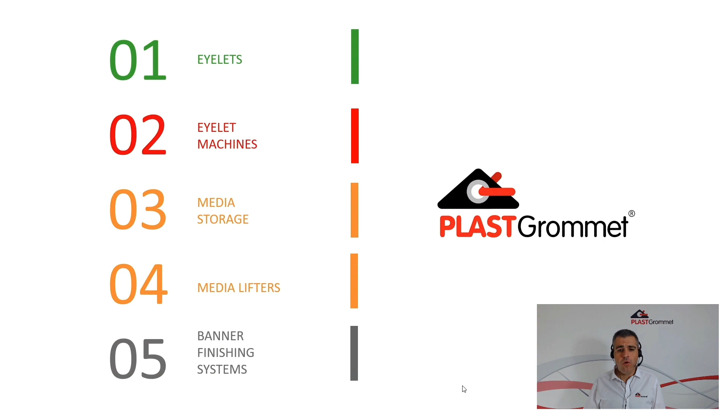So the product range covers 5 different segments. We have eyelets, or grommets when we speak about the American market, eyeletting equipment, media storage racks to better organize the media rolls, and then we have media lifters. We have several models. And then what we call the banner finishing systems, the products we have to optimize the finishing of the banners.

So speaking about the eyelets, this is where we come from. The name of our company is PLASTGrommet. I think we've been the first company producing clear grommets for digital printing. We have our own plastic injection factory, so this is our own production.

We have a huge stock of millions of grommets or eyelets ready to ship, as we have many machines working with them worldwide. So we had to be able to deliver quickly, and our customers really like that we produce the equipment together with the consumable. All the machines are made exactly to the size of the eyelets, so everything works perfectly.

Clear eyelets are, we think, a real alternative to the metal ones for the graphics industry, because they are recyclable, resistant, and invisible. You can see it on the image on the right hand side. You can see the color underneath. This really makes the final banner look better compared with the metal ones.

And especially these days with all the price increases, they are really cost effective, because the price of the raw material is quite stable. It has gone up like everything else in the market, but it is more stable than the metal ones. So a lot of customers are choosing clear eyelets as a very cost-effective way to finish the banner, not only because of the look, but also because of the cost effectiveness. So we really call it the smart choice.

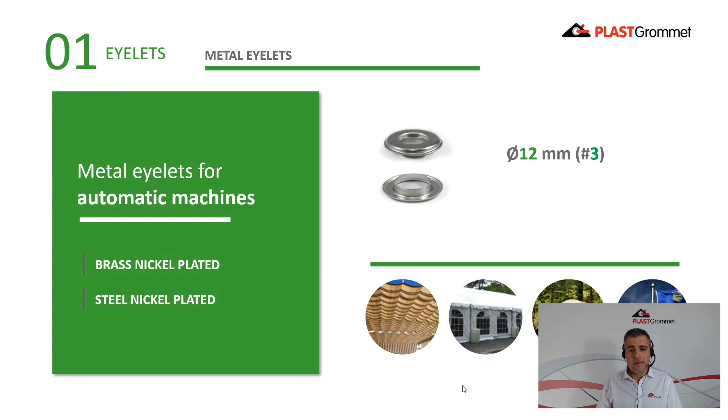And exactly as with the clear ones, we have stock that we can deliver to customers, and these eyelets are for automatic machines with neck washers, and they work perfectly with our equipment. So we are now able to cover the entire market, no matter the type of eyelet you need for your production.

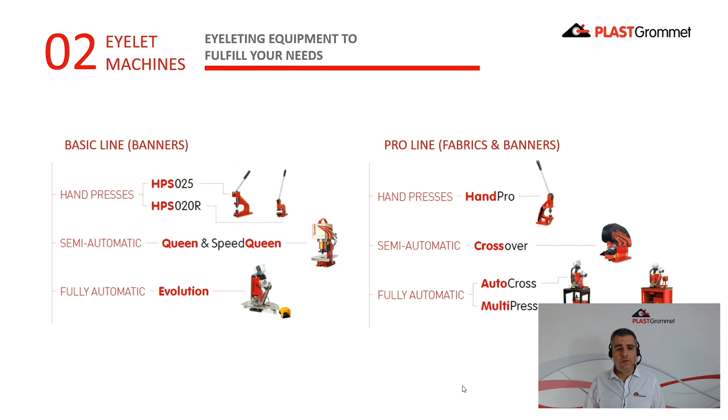In both ranges, we always have a hand press, then a semi-automatic pneumatic machine, and then fully automatic machines. In the Pro line, we have two different models, AutoCross and MultiPress. Multipress basically has more features than autocross, so more electronics, so it really goes to the high end of the market, and it has something called pre-cutting.

That means we don't cut and set the eyelet at once. First the machine does the cutting, and afterwards it sets the eyelet. This is really appreciated by customers setting eyelets on fabrics, because the finishing is much better, since you reduce wrinkles 100%.

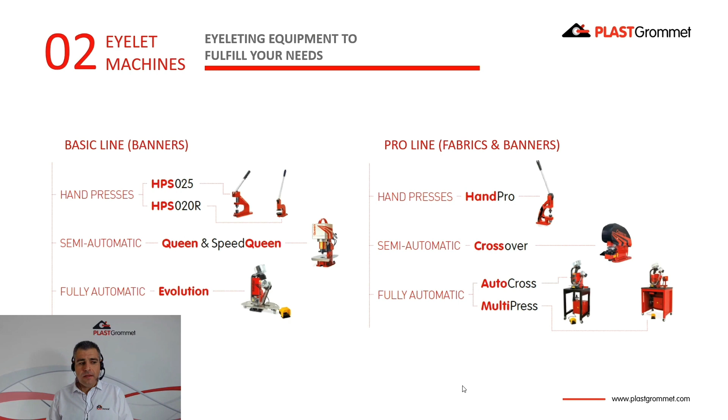And then we move to the media storage racks. Okay, so rolls are normally all over the ground. They get damaged, dirty, and things like that. So we have a range of about 10 different products, also for a small format and also for up to 5 meters, that you can use in order to organize better your rolls.

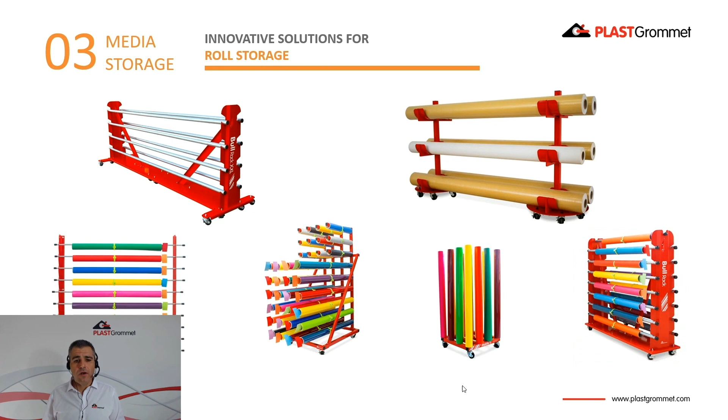The one we have, for example, on the right top is called a Jumbo Rolls Transporter. That unit works perfect with 3.2 and 5-meter rolls, and it can be allocated next to a printer. So for example, if you need to have rolls ready to be loaded to the printer for a night shift, you can have them there, and with a media lifter you can load it directly from the rack to the printer with a single operator. So end of the day is trying to find small efficiencies that will make the job easier and faster.

These are some examples. Sometimes customers will send us pictures of their shops, and you can have the ones we have in the center, that's called Bull Rack, horizontal storage of 15 rolls up to 1.62, and you can have them side by side. Then on the corner at the bottom, we have multi-rack, wall rack. So end of the day it's different ways to save space and to store the media better, so rolls don't get damaged.

We come to the media lifter range. So this is a product that is becoming more and more important in PLASTGrommet because there is really a large demand for this kind of devices. So the first one we got was the one in the center. It's called a compact lifter. This is a hydraulic lifter that's capable of lifting up to 200 kilos. And it is very easy to use. Operator has to press the pedal in order with the pump to lift the roll.

And then you can see that in the front of the lifter on the forks, we have a metal part that has 3 different positions. So it can be like this to load the printers. You can have it like this for safety, transportation, and it will go downwards when you want to load the rolls from the ground.

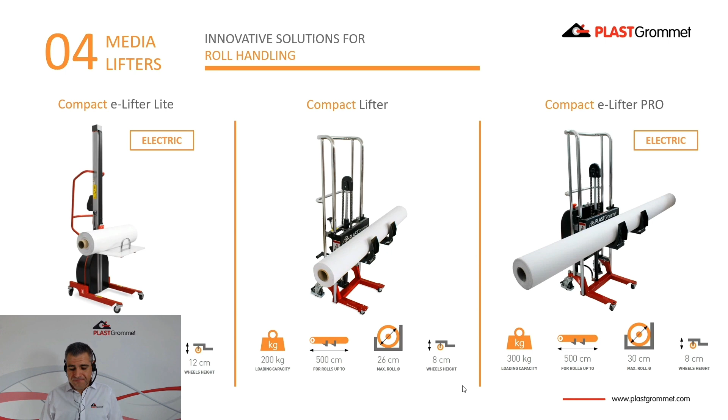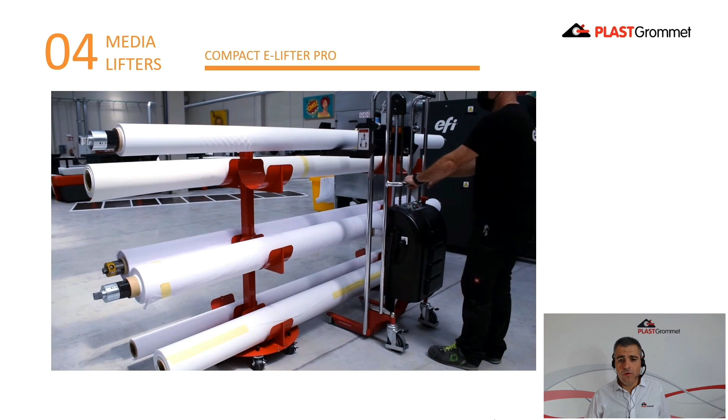That happens a lot of the time, and it is extremely easy to move it from the shop to the warehouse. We have some customers that are getting it just to transport boxes in the picking area. This is a video where we can see in combination the jumbo roll transporter together with the compact e-lifter.

Okay, so this will be the core of the presentation. So these are what we call the banner finishing system. So what we do is integrate eyeletting equipment in machines in order to make not just eyeletting, but different processes as well, okay? So the one we have on top, we call it Roll2Roll Lite. This is a product manufactured for companies that are making rolls of fence mesh.

I know in Europe it's not common, but for example, in Australia and New Zealand, a lot of people will use pre-hem mesh. So that's mesh that already has a hem welded, and then you print on the material that is already welded, okay? And then the advantage is that out of the printer, you have a roll that already has the hem, but still you need to eyelet it. So we have this system with 2 eyeletting heads on the sides and then a couple of air shafts on each side. So it is very efficient because a single operator is able to finish both sides real quick. Then, for example, we move to the all-in-one that we have mentioned before.

This is the inline system that integrates welding, eyeletting, and slitting or rewinding on the back. So this is really the product we have that automates the production the most. As I said, if you have the correct type of jobs, this piece of equipment can really make the difference in your finishing operations. Because if you are printing, for example, fence mesh, not pre-hemmed, that you need to do the hem out of the printer, this kind of machine in 7.5 minutes will be able to finish a 50-meter

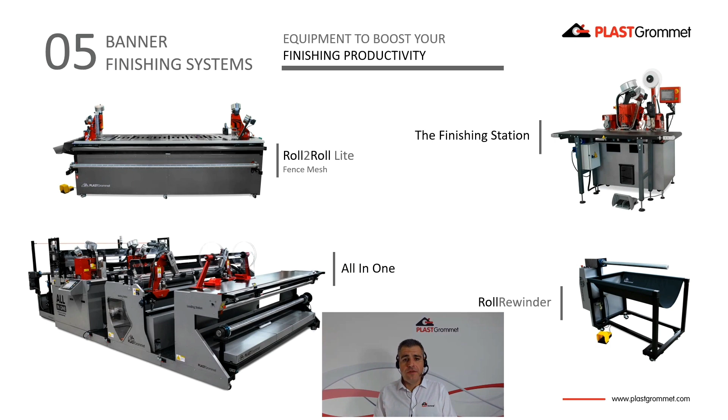And then we have a small device that we call roll rewinder, because many times the small banners that customers make for supermarkets and fast food chains, you need to roll them for shipping. Normally that would be a process that you do by hand. With this kind of rewinder, you can use it with or without a cardboard core. So you will roll them real quick, and then with a poly bag and a label, the banners will be ready for shipping. So those are small things that, when you put them all together, really make a difference in terms of finishing efficiency.

And this is the kind of workflow that we displayed at FESPA Berlin this year. So we were trying to explain to customers how to achieve an efficient workflow. We were starting at the booth, loading the rolls with a compact lifter instead of doing it by hand, as everybody does. Still, when you go to the shows, you see that technicians are loading the printers by hand, and that's dangerous for the back, and that's not very professional.

So with this kind of tool, you can easily load the rolls, you finish the long edges with the all-in-one, and then you move to the finishing station for the short ones, and then you take the banners for rewinding. So that is how we see the workflow in terms of banner finishing when you have large productions.

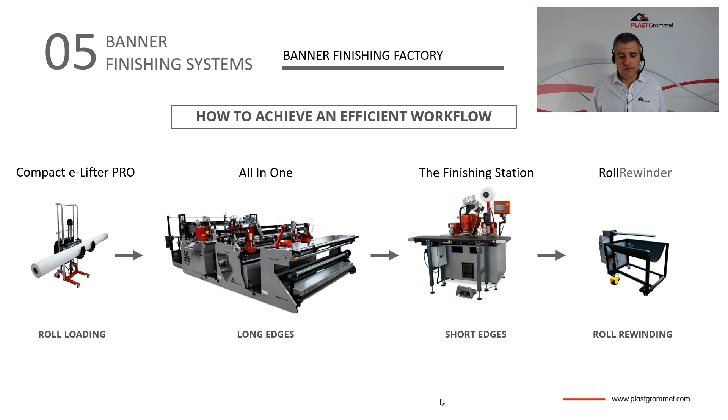So let's talk about the finishing station itself. As you can see, the machine has integrated a welding head together with an eyelet press. In this case, this is a multi-press. From our Pro range, it is the most advanced machine. In front of the machine, we have a conveyor belt that is fully synchronized with the rollers that the machine has.

So we have one traction roller on the left of the welder, and then we have another one on the other side. Everything is fully synchronized in order to reduce wrinkles, because if one roller goes at a different speed than the other, it is not going to be even, and the hemming won't be a good finishing. We are able to make 3 different types of finishing with this machine.

The standard one will be the hem. We are also able to do webbing tape. That will be a polyester tape, PVC coated. Normally it's used for fence mesh because the mesh itself is a weak product because of the light weight it has, and when you make a hem, still it will be like 350 grams or something like that.

So the majority of the time you will add a webbing tape welded in order to make a strong product and more durable outdoors. And also, not very often used, but if you have this kind of finishing in your production, a really fast way to finish is to have keder.

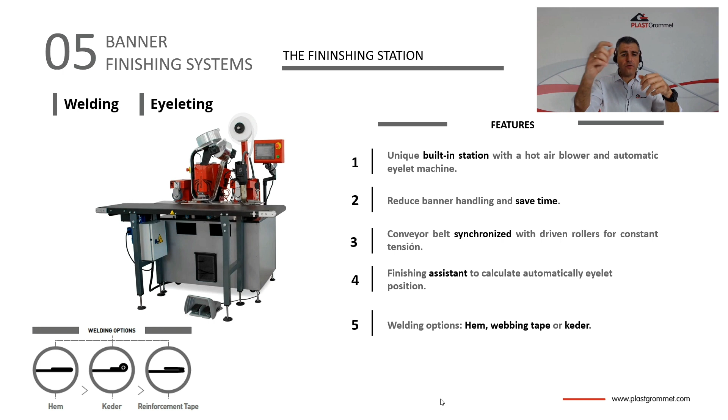We have some customers that have to weld keder on, for example, advertisement banners for trucks. There are many systems in the market where you have an aluminum profile on the side of the trucks, and then they have a quick change system where you have to fit the banner on a rail. So you do like this in order to fit it, and then you have to weld a keder profile on the sides in order to do that.

With this machine, if you change the welding guides, you can do keder as well by only changing the guides, so no further modifications are needed. And something important, you see that we have a big screen over there.

So the operator has a wizard, or a finishing assistant, where if you input the banner size, the width and the length, the number of eyelets you want to have on that particular banner, the distance from the edge, and some small things, the PLC will calculate exactly where it has to set the eyelet. Okay, so the operator doesn't have to pay attention to where the eyelet is set, because the machine is going to stop by itself, and then the operator will press the pedal to set the eyelet.

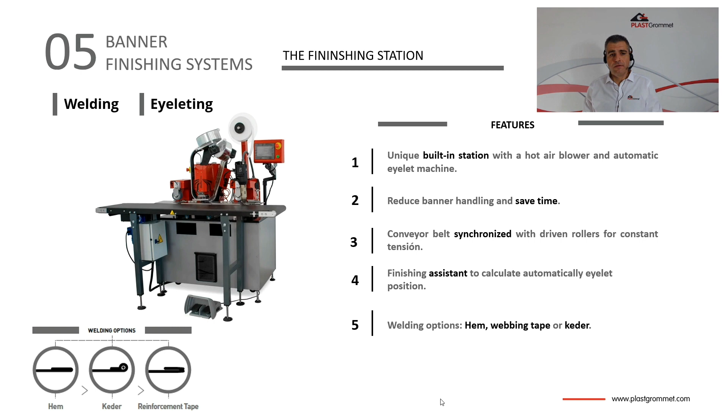Okay, so besides the conveyor belt that I mentioned, we have what we call extension tables with rollers. It's very important, especially on the loading side, to have a very easy feeding of the banner, because you don't want to have tension on the material, because the operator is the one controlling the hemming guide. So it is very important to have these kinds of tables in order to have smooth banner feeding. It's more important on the loading side than on the outlet side. Okay.

We have on this machine an automatic roll edge alignment on the loading side. So this means that it doesn't matter if, for example, the rolls are not straight when you print them. We have a system that will correct that. It will automatically move left to right, and it's constantly reading where the banner is located.

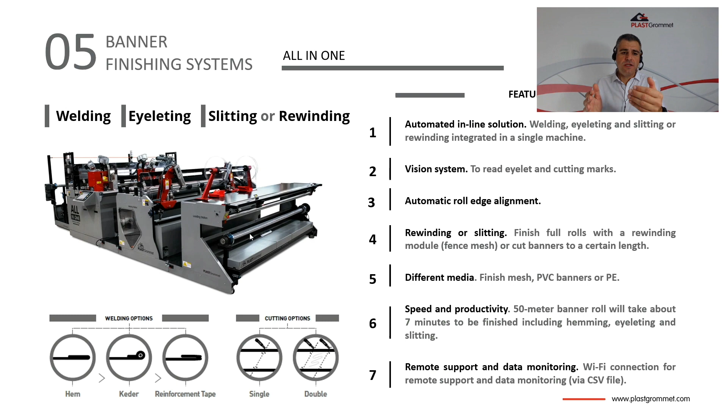Because if the banner doesn't go exactly in the correct position, just think that if, for example, the banner slides 10 millimeters, maybe the eyelet is going to be set outside the banner. So the idea is, I'm controlling all the time where I am, and the banner is always perfectly straight to the eyelet setting line, which we measure on the machine on the left-hand side of the screen. Okay.

Then we have the welding heads. The welders never stop welding because we want a continuous process in order to have a perfect weld. And after the welders, we have an accumulating system, dancer type, because we need to create a buffer of material before the eyeleters. Because to set an eyelet, we have to stop the banner, okay? But we don't want to stop the welding.

So what we do is accumulate several meters of material in between, creating a buffer, and then the PLC controls all the different speeds. And when the eyelet is set, it will move really fast to the cutting unit that we have on the back. Okay. So for customers producing rolls of fence mesh, instead of using the cutter, we use a rewinding module at the end, so we are able to produce roll to roll. Normally it will be mesh banners, but also PVC or whatever.

For example, we have some customers that instead of printing on mesh or PVC, they are using PE. If you have a PE media together with clear eyelets, you have a 100% recyclable product. So there is no need to remove metal eyelets or things like that. The PE banner can go into the PE waste stream with no problem. That happens, for example, with a lot of banners used in the UK for supermarkets and fast food chains, that are using our eyelets together with PE for recycling reasons.

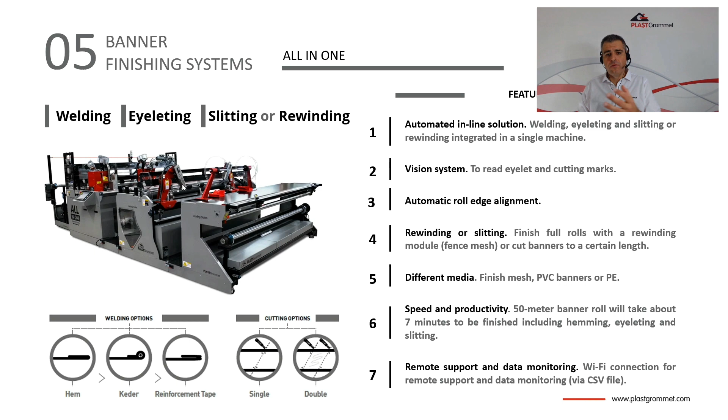So via CSV file, we can send to the customer some information from the machine in terms of linear meters that the machine has produced, number of banners, number of eyelets, downtime, whatever is needed. So also trying to give the customer information in a way that they can upload it to their own system. Okay.

So we manufacture the machine in 3 different widths. 1.6 will be the smallest one. The most popular size will be 2.4 meters. And then the maximum width we manufacture at the moment will be 3.2.

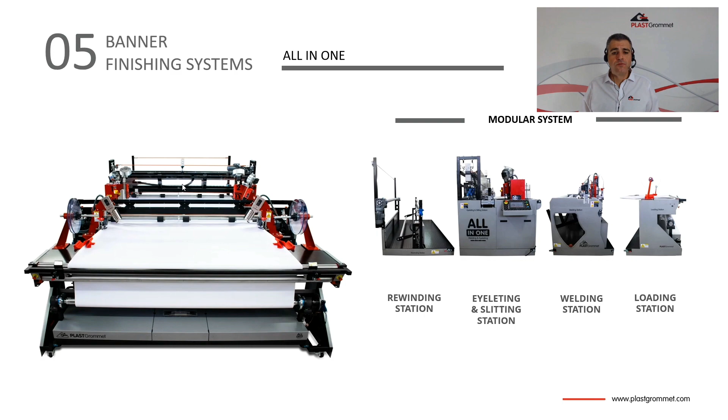Okay. And you can see that the machine is made in different modules. The reason we do it is in order to have a fast and easy installation at the customer side. So we don't want to be 3 days putting all the machine together. We only want to be 1 day putting the machine together, and then we want to be 3 days training their staff, because that's where they really get the most out of the machine, if the people are well trained. Okay.

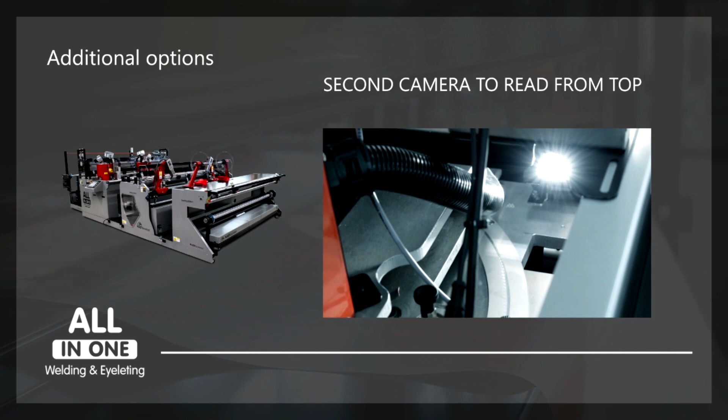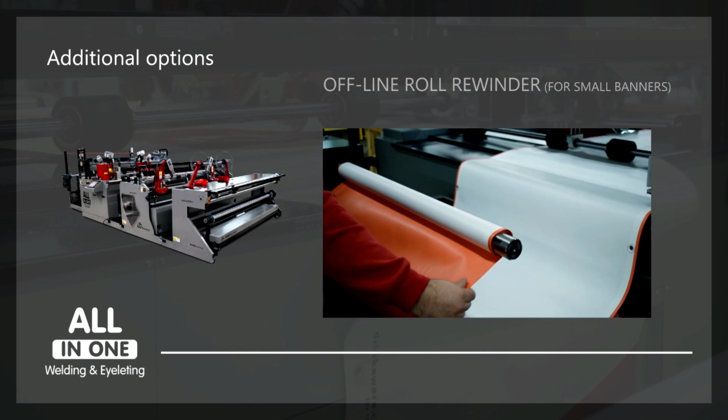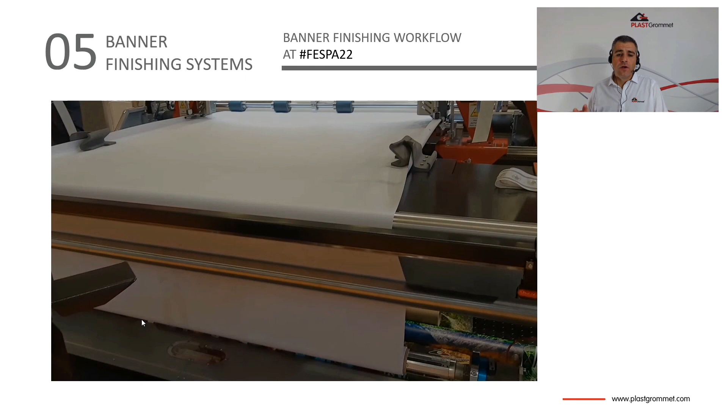Okay, so that was a general video of the machine. Now we have this video that you can download later. This one shows particularly the workflow that we had at FESPA. So exactly what we were doing is finishing the long edges with the all-in-one, and then we were taking the banners to the finishing station to finish the short ones.

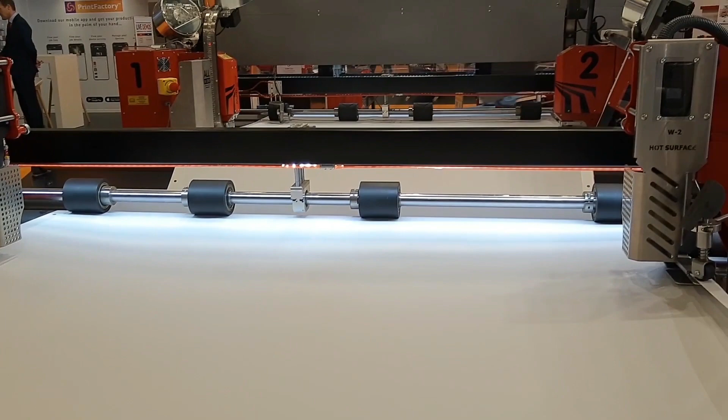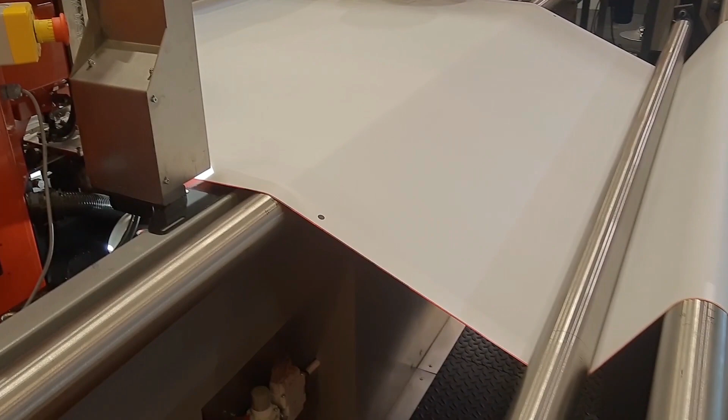Let me try to find something here just to see the marks. So you see just a bit on the right hand side of the screen, there are some marks here. So we have a camera on the edge that is scanning those marks. We have one mark for eyeleting, and we use a different mark for slitting. Okay, and the camera is reading all the time.

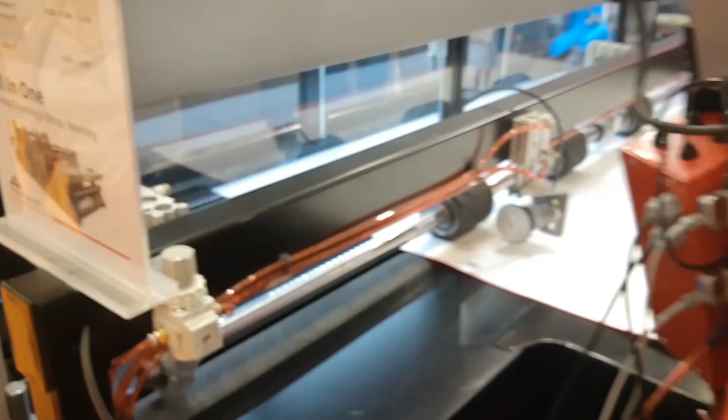So if you leave the hem blank and you print the dots for eyeletting, then the camera is going to set the eyelet exactly in the correct spot. In this particular case, we got dots along the edge, and then on the corners we got a cross.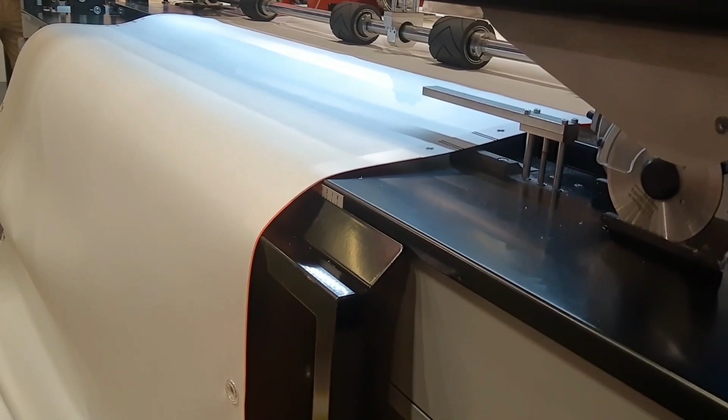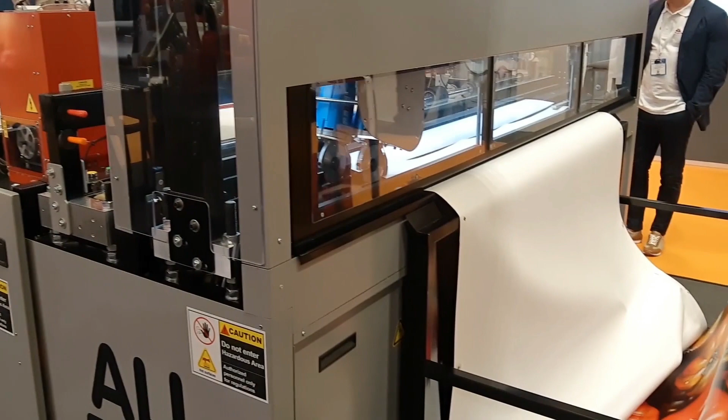The cross won't be picked up by the camera as a setting mark because it's a different one from the dot they are scanning. So nothing will happen, but still it will be a visual reference for the operator when they have to take the banners to the finishing station for finishing the short edges. So they have a visual reference of the cross in order to know if the setting is correct or not.

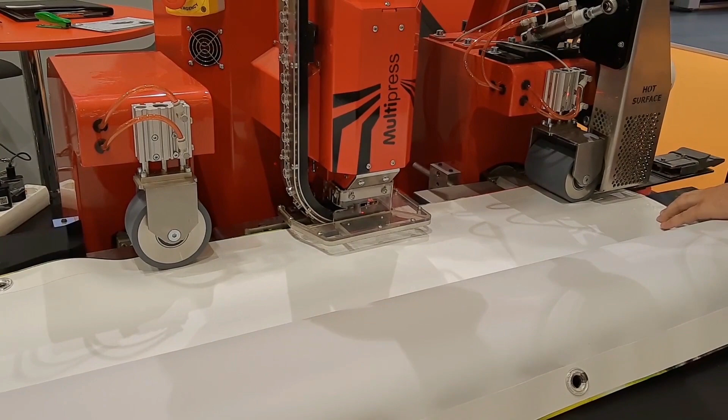We have different machines installed in Australia, and before COVID, we got an order from a company called MediaPoint. They are a trade-only printer in Melbourne. They have a lean process for everything they do, and they were trying to streamline their banner finishing process. And we contacted them, and they visited our factory. I think it was November 2019, and then we got the order, we produced the machine, and that was right before the pandemic.

I remember that the week we had to load the container, that was the week we had to stay in lockdown in Spain, so it was a complete disaster. Also difficult to explain because in Australia the lockdown came months later compared with Europe. At the time of installation, around June or July 2020, we were not able to travel. Normally we send our technicians to do the installation and training of the staff, but in this case we had to use our distributor, Eurotech. James traveled from Perth to Melbourne by car, which is like going from Spain to Russia, a huge amount of kilometers. Then we had to hire a local engineer to do the setup, but everything worked quite well.